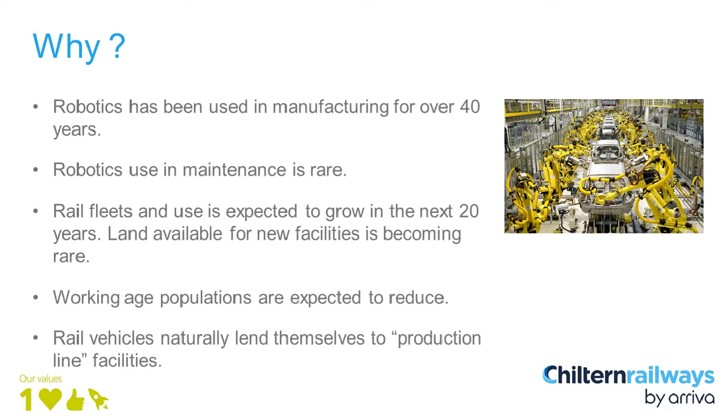We expect and hope that post-COVID, rail vehicle ridership will recover and increase, and certainly to meet our current ambitious climate change targets, we would expect further global modal transfer of people onto the rail network. Our environmental issues will remain.

So what are, where might we use robotics? In terms of where I think they're most applicable, it's going to be tasks that one might describe as dull, dirty, difficult to do, dangerous and frequent.

So examples might be cleaning. It's not particularly dangerous, but it requires lots of labour. Particularly on mainline passenger vehicles, there's lots of fluids involved, so toilets require fluids, water, and we also need to empty them. On a diesel vehicle like my own that we operate, we have to top up diesel fuel fairly frequently. But also things like replacing brake pads or brake blocks, and working on high voltage equipment such as shoe gear and pantographs.

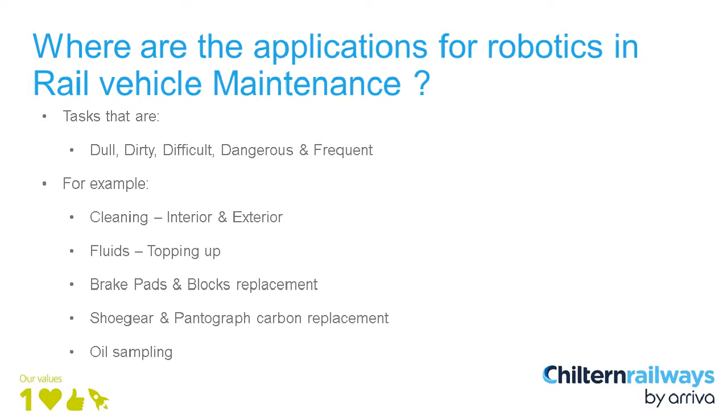So back in 2016, RSSB commissioned three academic feasibility studies on the use of robotics in rail vehicle maintenance.

The first one was between Brunel University and ourselves, and that was about the application of robotic fluids, and I'll go on to talk about that later. The second one was with Cranfield and Heriot-Watt universities, and also with ourselves and Bombardier, to look at the application of robotics to cab front cleaning, and I'll talk a bit about that in a moment.

The third study, which I won't discuss too much, was with Birmingham University and I think Southern Railway, and looked at the application of additive manufacturing to railway wheel sets. The basic idea was to have a wheel set fitted to a train, and rather than use up the wheel set life, as the wheel tread was used up, you would spray new metal onto the wheel set to rebuild it, so you effectively had an infinite life wheel set. It was a really good idea, but sadly fell down when they started to think about metallurgy.

Because if you think about a railway wheel set, it's a forged item, and it also has some fairly strong heat treatment on the wheel tread. Trying to replicate those features with 3D printing is not yet possible. That's not to say that in the future it won't be possible.

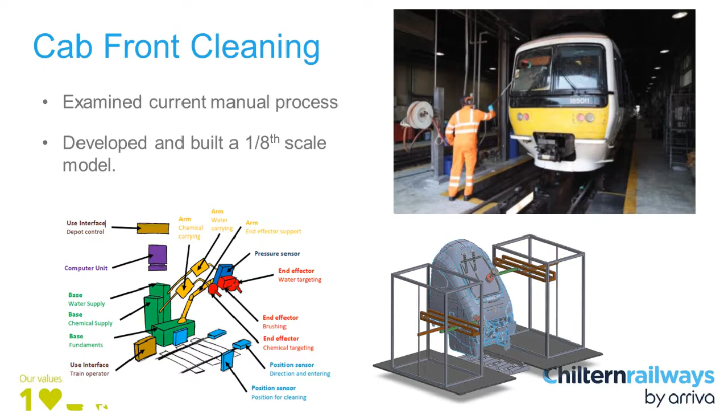So, moving on, the current slide you'll see is the 1/8 model. It's based on a well-known UK train that you may see on the cross-country network, for example. You'll see how Cranfield developed a cleaning head that would potentially clean the front of a train.

The cleaning head, or end effector in robotics language, is actually quite a complex piece of kit. It has to include and dispense both water and detergent, and also have pressure sensors, because we don't want to damage or apply too much force on the front of the cab, or knock and damage things like windscreen washers, which could be anywhere on that cab windscreen front.

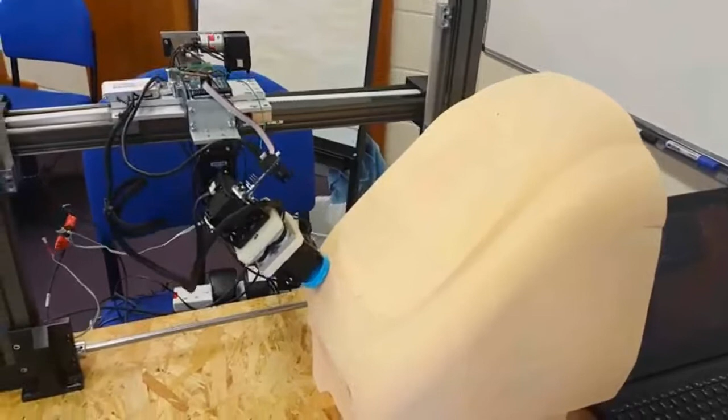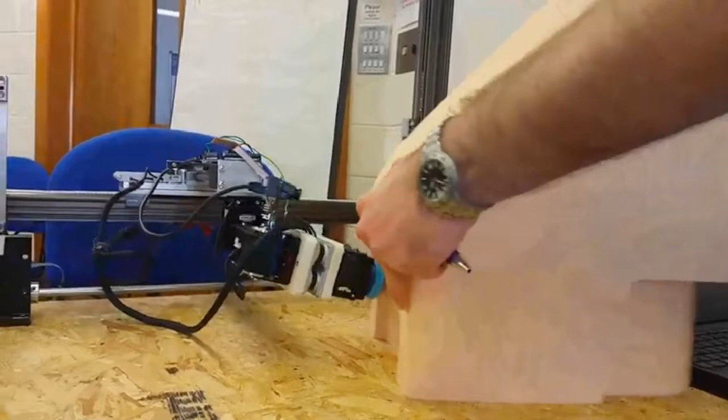But the discontinuities make it quite a difficult challenge. Cranfield and Heriot-Watt together managed to produce a control system that would potentially do this. Now it's being taken forward by a company called Garrandale through a knowledge transfer partnership, and they're developing this technology. They have a business that builds train washers to clean the sides and roofs of trains, and they see this as a complementary offering. So we should see train front and end vehicle cleaning robots available soon, I would hope.

I'm now going to move on and talk about a project I find much more interesting, and more relevant to where our business is - how to replenish and remove fluids from trains, which as a diesel train operator is of particular interest to us at Chiltern Railways.

Mainline trains require frequent, sometimes daily, fluid replenishment - things like fuel, oil for engines, fresh water for toilets, but also removing toilet effluent and topping up sand and windscreen wiper fluid. This is applicable to both diesel and electric trains. Electric trains have most of these fluids but obviously don't have diesel fluid.

For us as a diesel operator, this is a significant labour requirement, and a lot of depot capacity is used up just doing these tasks, with some health and safety hazard exposure. We fuel our trains typically every 2 to 3 days.

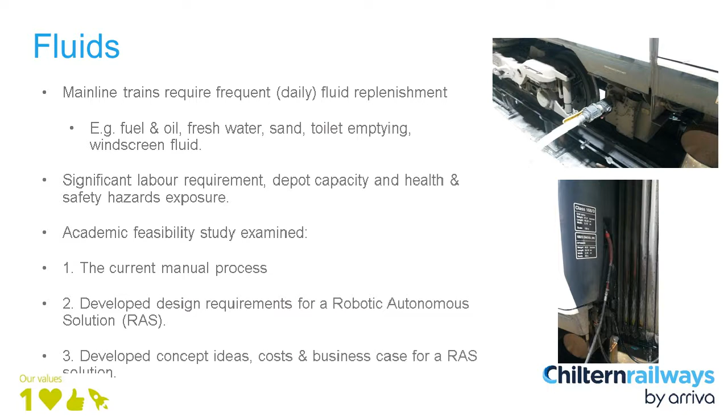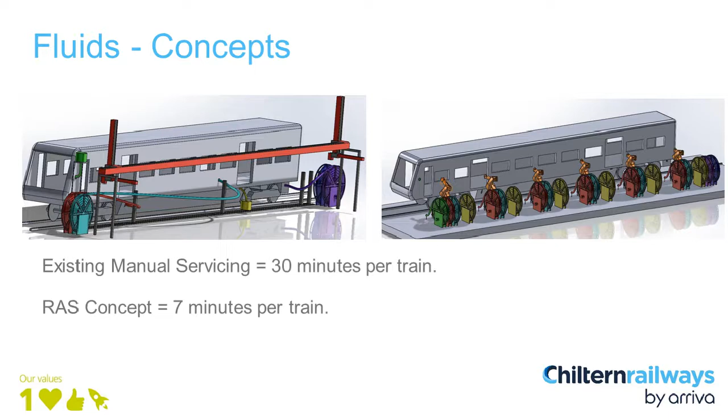So that was the concept work with Brunel. We then bid for further funding with a company called TBG Solutions and Brunel to develop the concept further and start to test some of the ideas.

What we also started to look at is how we would interface with the vehicle, what we call the ports. Right now, all our ports are designed around human beings interacting with the rail vehicle to put in diesel fuel or water, and those port designs may not be as easy for a robot to use.

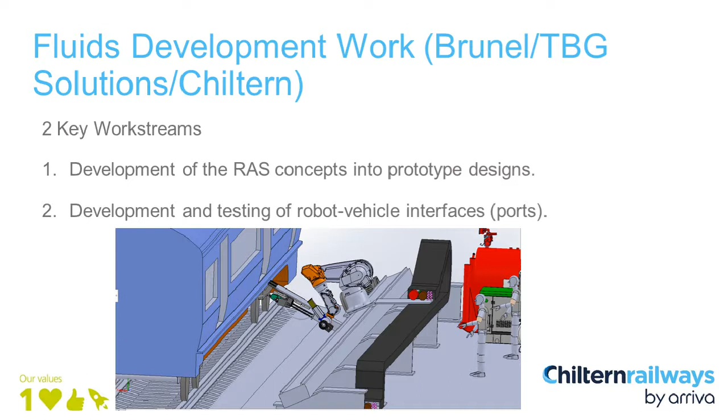What we did was construct a test rig, as you can see on the next slide. Here is a body side image of a train with the great Isambard Kingdom Brunel sat in the window looking out, and our robot here slides on a slider with the various attachment points moving in and out. Unfortunately this photo was at a much earlier stage of the build.

It's much more advanced now, and there is a link to a YouTube video hopefully available that shows the complete robot in action, attaching and detaching to the train and then applying dummy fluids.

About 18 months ago we demonstrated this to various industry stakeholders like RSSB, the Department of Transport, and various new train builders, and got very good feedback, I have to say.

But that is largely where that project's got to. So I think we've reached the point where we've managed to demonstrate the technology, but we now need to take it further, industrialise it, and demonstrate it on a proper train and in a proper depot.

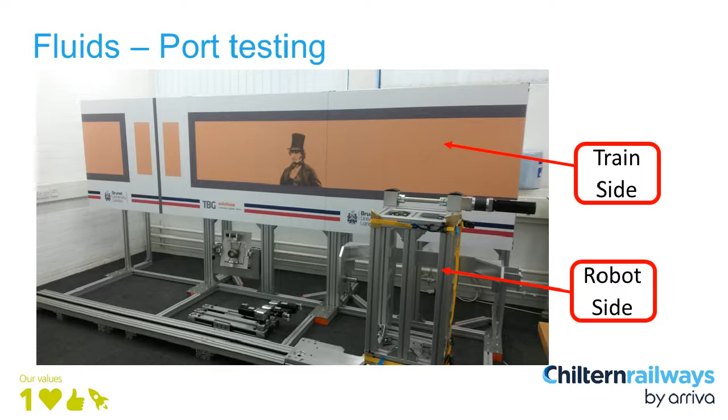So where are we going with this? Well, our vision is to develop a robot servicing road. For those of you not familiar with depots, we divide these spaces where we park the trains into what we call roads. Our aim is to develop a road that does a number of different tasks all at the same time.

I think we will start off with the tasks we've already worked on, such as cab, front and body end cleaning, and also look at fluid servicing, because we've done quite a bit of development work in those areas.

But we will also start to look at the automatic inspection of brake pads, wheels, and underframe equipment, where there is some technology already quite well developed. Then take that a step further, so when you inspect the brake pad, you develop the technology to replace it if it's worn.

Similarly, on the shoe gear and on the pantographs, if you've got a worn shoe or a worn pantograph carbon, develop the technology in the robot to change those elements.

This would release, once it's developed and proven, a lot of additional depot capacity as we roll out across depots in the UK and probably internationally. But as we said, we would probably have to make some changes to components that we fit to trains to make them more suitable for a robot to work on.

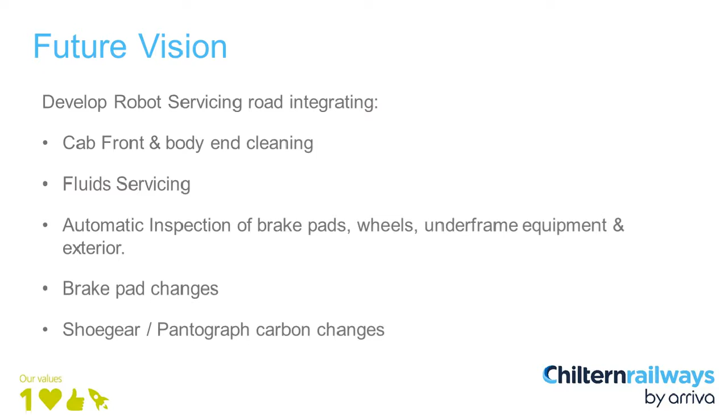So, in conclusion, rail vehicles are remarkably well suited to robotic maintenance. If you think about it, my train only operates in one dimension. And we have the opportunity as an industry to leapfrog other industries in the application of robotics to maintenance in particular.

We've done a lot of early concept work now on the dull, dirty, frequent maintenance tasks, and now we're looking to develop those further.

I have to say that we've struggled so far, because probably the next stage requires a few million pounds to really develop and demonstrate the technology and how we test it.

But we also need to bear in mind that we may need to consider changes to trains and standards, so they are better able for a robot to maintain them. So our next stage, and we are talking to large manufacturers who do a lot of the maintenance in the UK, is to start developing ideas to build much larger prototypes.

And we are also sponsoring, through Cranfield, PhD studentships to develop the ideas and the technology further.

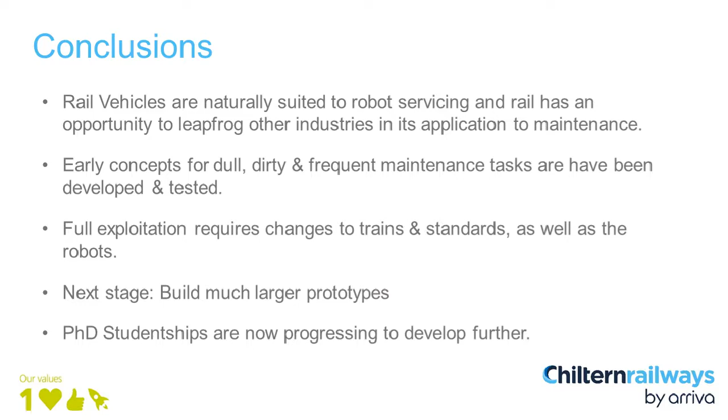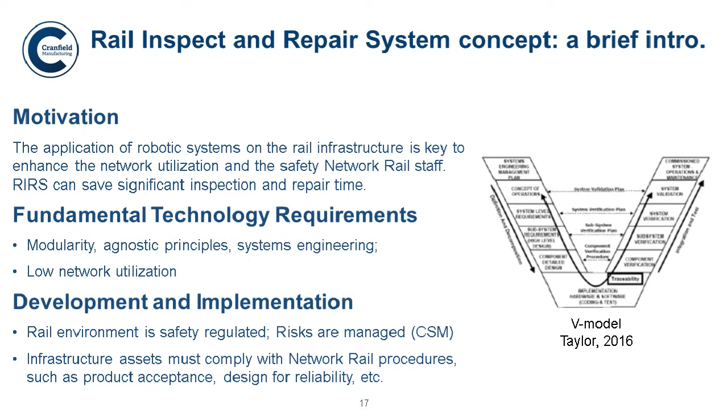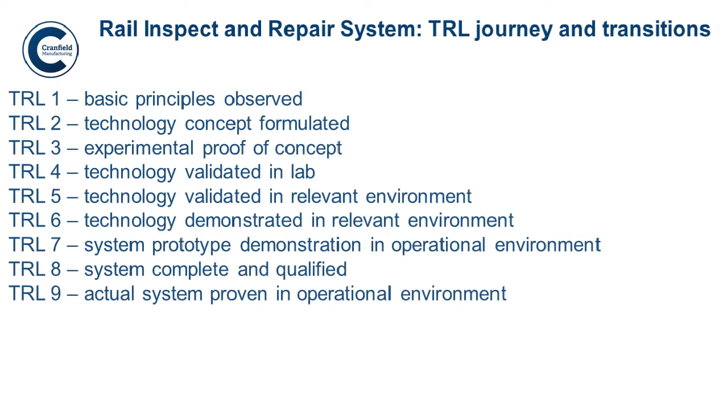the discussions take place, then from there they perform a look at technologies that are available to deploy and to satisfy their required needs. It was concluded back then that they needed a new method and a new vehicle to achieve the inspection system.

So the new framework was developed at technology readiness level 2, and at technology readiness level 3 we have the initial developments of the architecture, also known as the command and control architecture. First on...

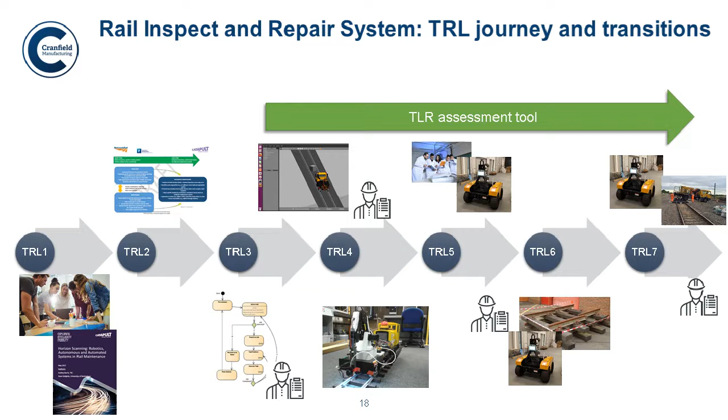So one of the critical aspects of this rail inspect and repair is the architecture. Here I'm illustrating the machine state diagram, and this is quite important because it tells us what is expected of a robot in the rail inspect and repair system. What is expected of it is to select a job, being able to select a job, and then transit to a job.

Position itself to being able to perform the task. In this case, it could be a payload robot, it could be a gripper of a robot, or any other technique we decided to use for this system. In our case, it will be a robotic arm. And then to position itself near the position to execute the task.

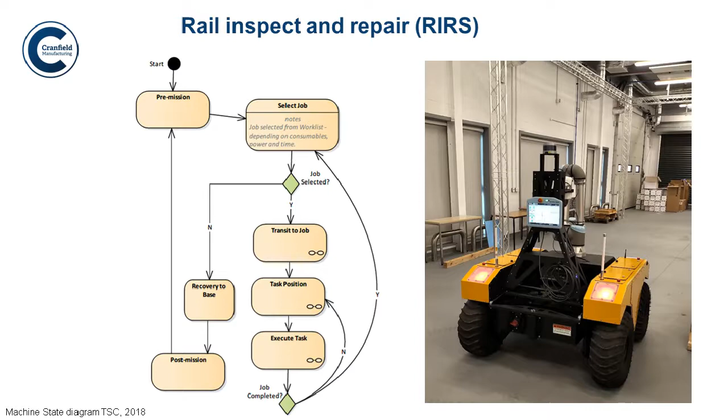On completion of the task, the robot is ready then to select another job or return to base. So this is the essential machine state diagram that enables or describes what are the activities that the robot needs to perform within this system.

So the early developments, as I said before, were by the Transport Systems Catapult, and they produced a model. This model demonstrated for the first time the inspection and repair technology. It used a simulation model, which was quite difficult to assemble and to make work, but they got there in the end.

We conducted the V&V process, the verification and validation process. The system that they produced demonstrated the architecture, and it also made use of a large number of the stakeholders and system requirements specified for this product. But it was only a software demonstrator.

So we then, Cranfield developed NEMO, which is a hardware demonstrator. NEMO demonstrates the application of the rail inspect and repair architecture. It uses Arduino controllers, it can perform fault search on a track, and it uses color detection cameras to detect the simulated faults.

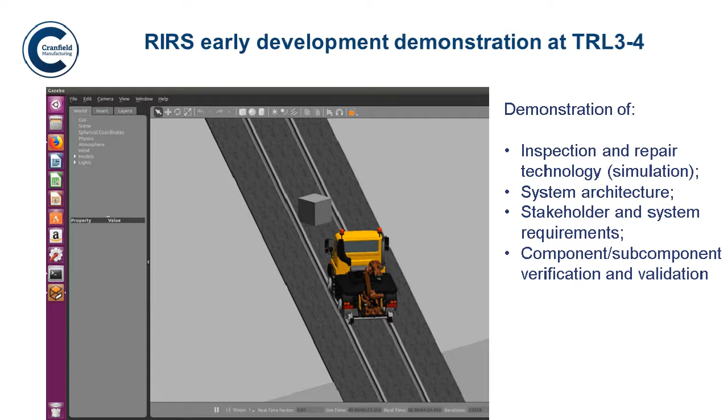NEMO is, as I said, a small scale robot with a gauge of 5 inches. It does have cameras at the front, replicating a bit what the new measuring train does. And then once it's located these simulated faults, it then goes and does a 3D printing on the place of the fault.

Okay, so it looks like my video won't play, so I will move on to the next slide.

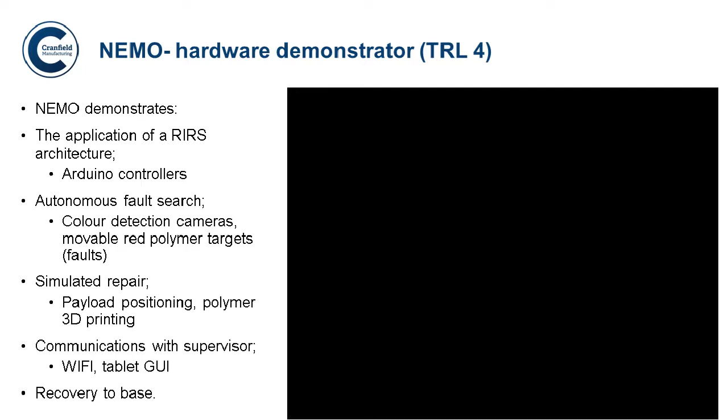So for the higher technology readiness levels, we now have a Warthog ClearPath from the company ClearPath. This is a vehicle purchased by Network Rail, and it's currently in one of our labs. It's a fairly mid-sized robotic vehicle, comes with its own robotic arm, measures about 1.5 meters in length, and it's just about the size of the gauge on the rail track in the UK.

It does have a number of communication systems like Wi-Fi, Ethernet, USB, and in its hardware it comes with encoders, LiDAR, GPS, and a universal robotic arm. It obviously also comes with drivers for ROS and RViz, which is the visualization system for this technology, and support for Gazebo and modeling. So this will be the main vehicle used for the higher technology readiness levels.

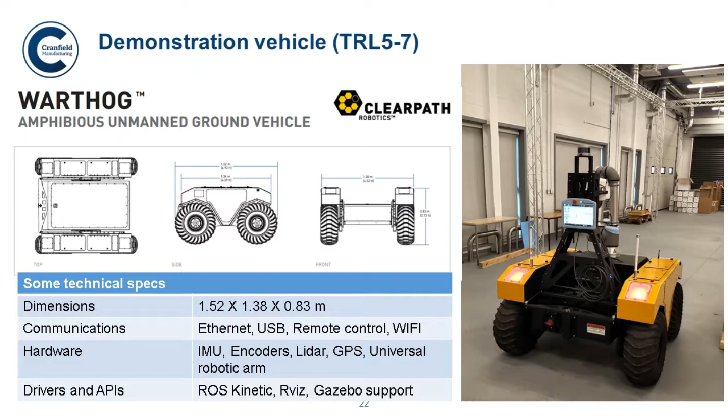So the tasks at a high level that we need to do for this vehicle: the first one is setting up, integrate the different systems, like for example the robotic arm and the command for the vehicle. We need to develop a use case, safety compliance, also as part of this, and improve functionality deployment.

And we move on to the 6th level, where we actually seed defects, and we command the vehicle to go where we need, maybe work around obstacles and things like that. Finally, the last stage is to do with test in a test facility for rails, and demonstrating the whole capability of the vehicle, as well as conducting validation and verification processes.

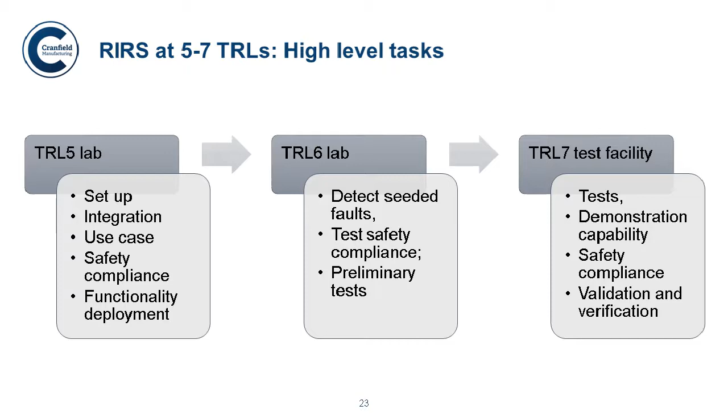So some of the challenges that we face with this technology, or will be faced by Network Rail, is the fact that at the moment we don't have a procedure to go into a possession. The vehicle at this stage, or the experiments, are designed to interact with people and doing a repair in a possession. A possession is a restriction to access for rail transit when maintenance in the infrastructure of the network is required; services are interrupted, and there is a very strict procedure to be followed in terms of assuring safety of all people involved.

And this means that no trains can go through the track during this period. As I said, this is a very strict procedure, so at the moment it doesn't take into account any unmanned vehicle coming into it. So this is one of the first obstacles that this technology faces, which is getting access into the rail tracks.

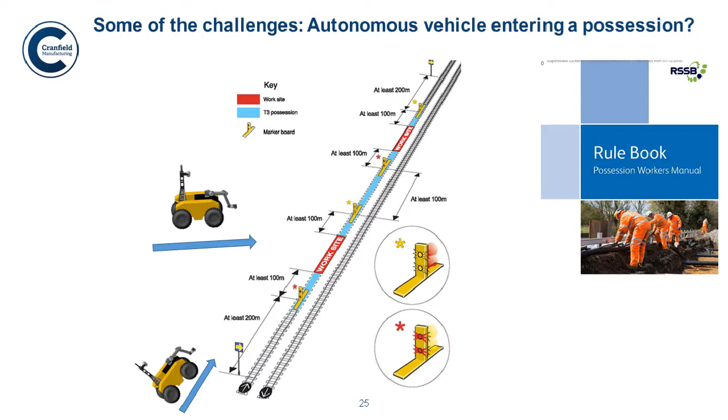Another of the big challenges we face is positioning, navigation, and location - being able to accurately position the payload where the job is required. This is primarily because it's a complex and dynamic environment. The robot needs to understand what's around it and deal with obstacles, people, and other network assets.

Another difficulty is that some of the faults we want to monitor and inspect may be at the centimeter scale, possibly with a number of them too close together. There are thresholds in network rail inspection methodology that also need to be taken into account to come up with an acceptable resolution for location. There will be several layers to accomplish this, using absolute and relative layers of positioning.

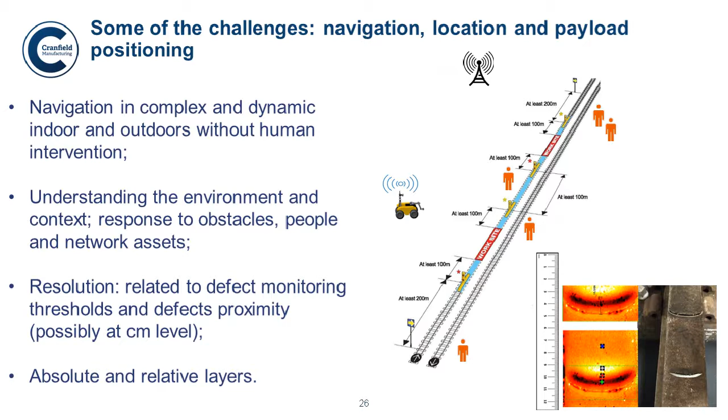For payload positioning, we have several effects and a number of error sources that affect it, and these need to be characterized and compensated for. If we don't deal with this, we would not be able to control where the repair takes place, so it's important to acknowledge where these error sources come from. We understand some will come from wear on the wheels, the vehicle's dynamic response, the trolley that might be put between the vehicle and the track, control execution, etc.

I'm going to play a video that shows some of the vehicle dynamics that we have to deal with.

I understand the video is playing, but I cannot see it here. I'm going to do it again so you can see it moves very abruptly, and that needs to be controlled as well. I'll move on.

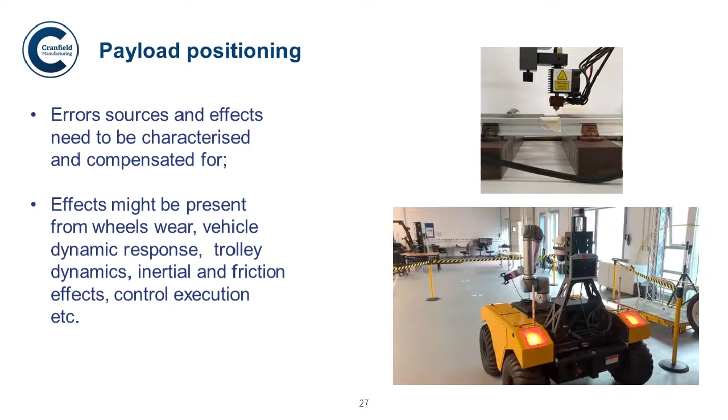I mentioned earlier that the width of the vehicle is about the same size as the track gauge, so we won't be able to make the vehicle run on top of the track without it being a very rough ride.

So we need to place a trolley in between to enable us to position our inspection methods. The trolley, the Warthog itself, comes with cameras and lidars, but we may need other inspection methods to position, and the best way to do this will be on the trolley rather than on the vehicle. So there will be some issues with this.

One of them is braking. We know these trolleys can run away if the inertial effects are not controlled properly.

There could be some issues with regards to loading or unloading the vehicle onto the trolley, so we need to devise our own procedures for this, and also the trolley will affect positioning - not only location, but also where we put the access points for these trolleys needs to be considered.

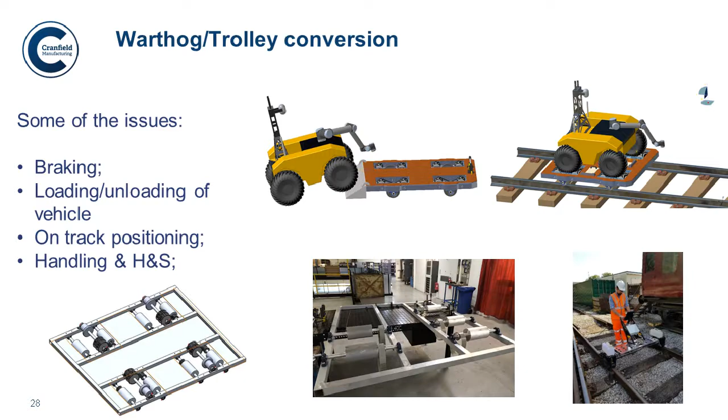There are also some issues with handling because it could be heavy, so that needs to be taken into account as well. We expect to deploy other technologies like ultrasonics and maybe thermography, but these could be the issues for the deployment of this type of vehicle.

I have another video I wanted to show, it's possible it won't play, but I'll describe what we were doing. We worked as part of the same project on a demonstrator to try and detect rail foot defects - defects that happen on the bottom of the rail. They're very difficult to detect, and can be critical defects that lead to accidents if not detected on time. This is actually a very hard defect to detect.

One way we attempted to do this is using thermography. We had a demonstrator where we put a thermography camera at the end of a robotic arm so it could scan a rail sample with a number of simulated defects machined at the bottom. There was some success - we were able to detect relatively large defects at the bottom, inspecting from the side of the rail sample. I would assume this video won't play, but let's have a look.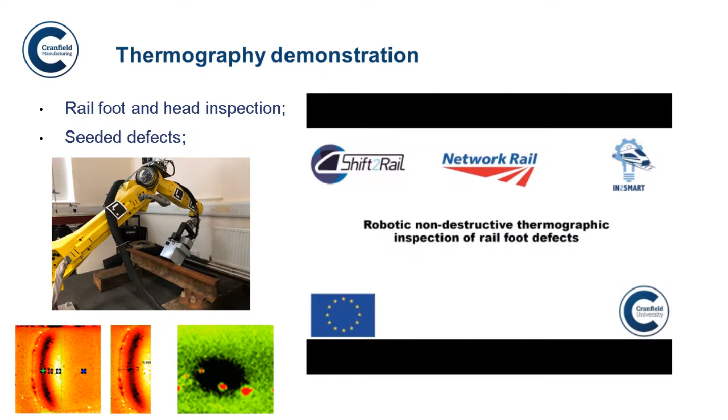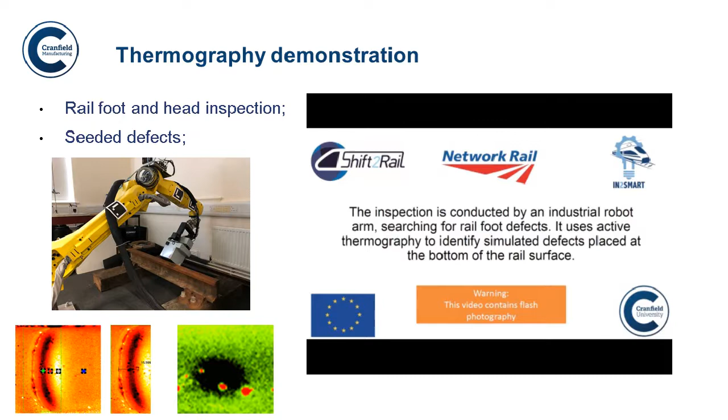So I don't see it playing, possibly it's not playing, but I wanted to illustrate the type of defects that we were able to detect. The green one is a rail foot defect, which has a diameter of about 20 millimeters, placed under the track, the rail sample. And the one that looks orange is a simulated crack placed on the rail head, top of the rail also.

So we've done some investigations with thermography at the end of a robotic arm in preparation for this phase of the project.

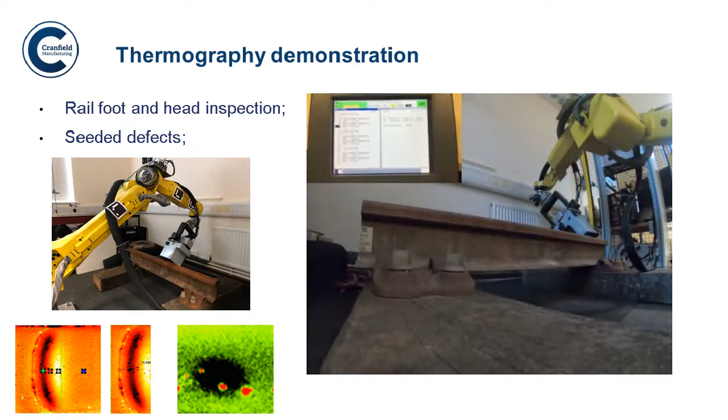There were also more demonstrations at Cranfield, and what to do, for example, with cobots. One of our students recently demonstrated or built a small device to show how robots could interact with people, navigating around interactions or obstacles placed by people. So again, it's a demonstration of technology.

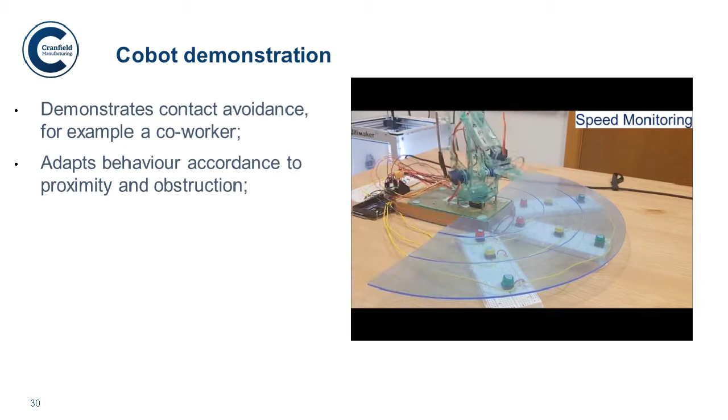Unfortunately, my videos are not playing for this presentation. We will not be able to see it today.

I'm just going to describe briefly the Autonom project. This is a project that was sponsored primarily by EPSRC. Our main industrial partner in this was Network Rail.

In the Autonom project, we were looking to develop a methodology, an architecture to be able to optimize maintenance, involving technical triggers, planning and scheduling, and developing technologies to best optimize the routines for maintenance, the calls for maintenance, which involve cost effectiveness. I think I can cover this on the next slide with more detail.

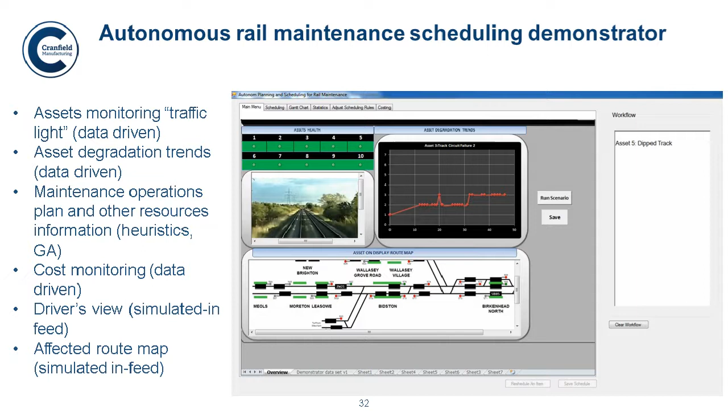Eventually, what the system does, or this demonstration does, is give you a schedule of maintenance based on the number of crews, which is then deemed to be the most effective way to do maintenance.

I just wanted to say, I apologize for this, I don't know exactly what happened. I just wanted to say that this presentation had many contributions from staff at Cranfield, Network Rail, and the Catapult Connected Places, and I just wanted to thank you all for your patience, and I'm happy to respond to any questions.